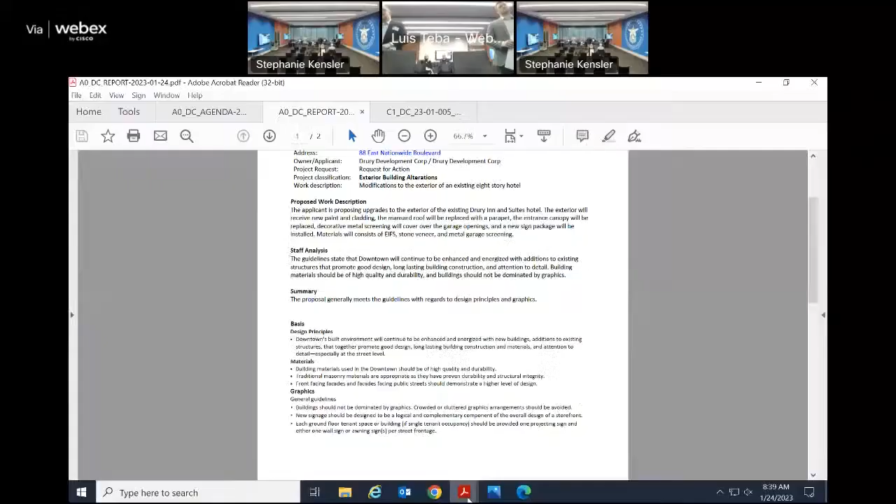Graham, and I'm sorry, what was your name again? Mark. And last name? Kohl, K-O-H-L.

Go ahead and tell us a little bit about the project, if you would. Obviously, we've got drawings and pictures and so on. Yeah, absolutely. Okay, I'm going to use my little cheat sheet as well over here. Thank you, Chairman Whitman and members of the Downtown Commission.

My name is Graham Roop. I'm a development associate of Drury Development Corporation out of St. Louis, Missouri, the owner of the 180-room Drury Inn and Suites located just directly adjacent to the Columbus Convention Center. Also here with me this morning is Senior Vice President Mark Kohl.

Our hotel was built in 2002, and customarily we perform an interior renovation about every 10 years or so. While we continue to be long-term members of the community here in Columbus, we are also planning to reinvest in the exterior of the building and will furthermore be converting to a Drury Plaza Hotel, which is our more upscale brand within our system. This morning, we are here seeking your approval to complete the necessary exterior improvements to bring our building up to our brand standard and further complement the buildings around us.

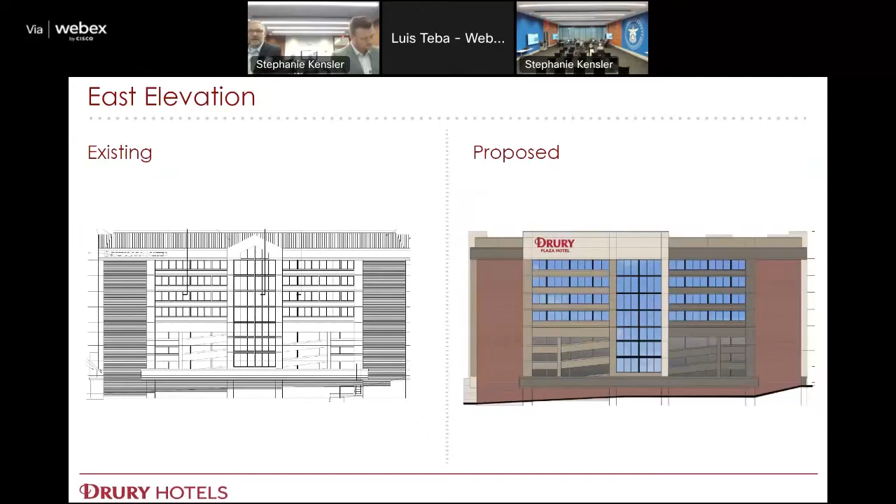What would be the 5 bullet points that make this particular product different? Sure. The Drury Plaza, from that standpoint, the interior finishes in the lobby will have some upgraded finishes, et cetera. The offerings relative to food service and also some of the beverage offerings that we do from a complimentary standpoint will be different.

In addition, here we're adding what we're calling a kitchen plus bar concept. So in addition to the complimentary food and drinks that we offer, we will also have a retail bar area with a light food menu in it. So those would be the main changes to the common areas of the building.

Sure, I understood the answer to Janice's question. Is this the exterior design a Columbus design, or is this an adaptation of something you're doing all over the portfolio?

Yeah, well, this building is not prototypical. So we only have 2 that are built in this configuration. This is the first of those 2 that are being re-imaged from the exterior perspective. So from that standpoint, this is the first and one of only 2 that will look like this. Our other buildings are our standard prototype, not more of this square shape.

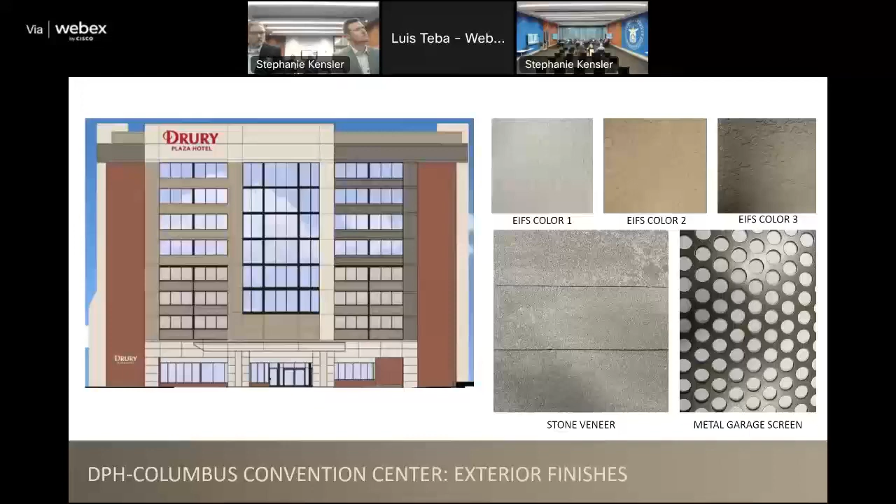And how about the ground floor along there? Can we switch back to there we go, thanks. So you've got a lot, or at least some amount more glass along the front, it looks like to me. Oh, I guess it is. Yeah, yeah, okay. Well, it's pretty much the same.

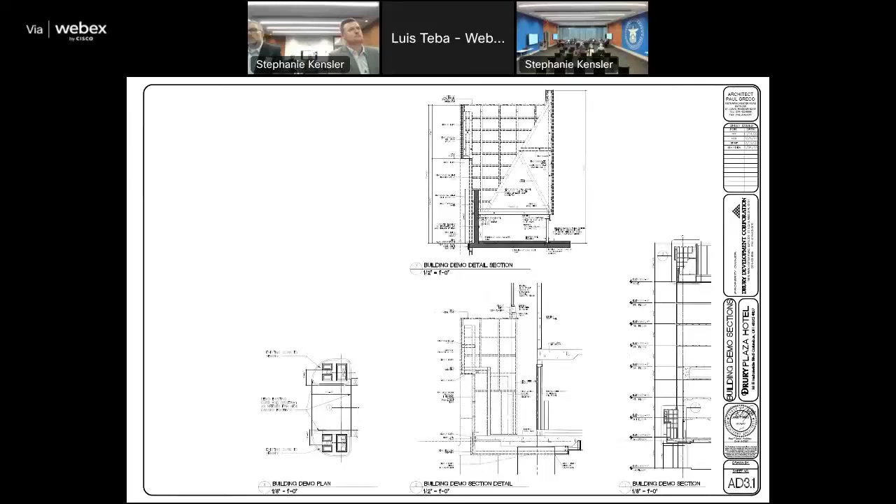The canopies and—what's everybody want to do? Do we have sufficient detail here on this thing? There's a lot of detail in the drawings. Okay. And I would point out that you are asking for the new signs as well, then. Yes, sir. Are there any site plan or landscaping changes?

No major landscaping changes. We have some accent beds and things that evolve over time around our signs, but nothing significant. I think it's an improvement of what's there, a big improvement. It'll be nice and new too.

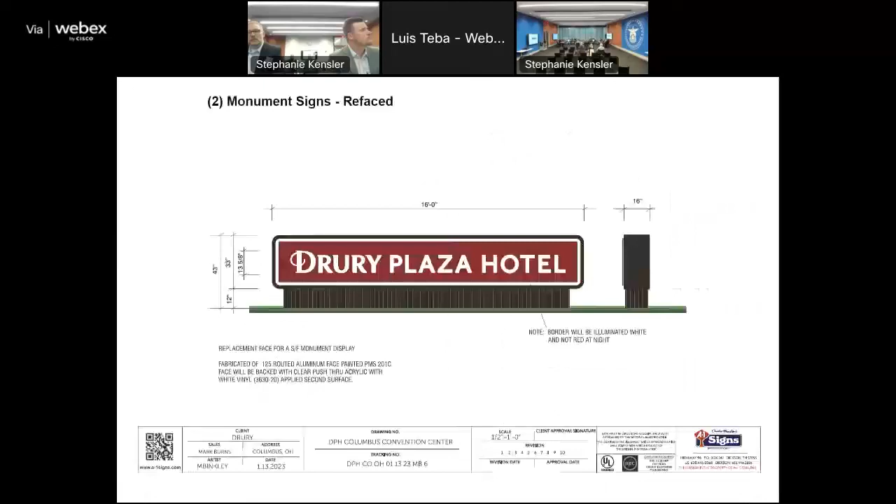I have a question about the original drawing. You have a pediment detail, and there's glazing in that pediment. Can we switch that elevation? So you see the upper middle, where there's the pitched roof with that pediment, and it looks like there's glazing right under there. Is that, on the original, clear glass, or is that spandrel glass with nothing really behind it?

I can't tell you the makeup of the glass itself, but I can tell you there is non-occupied space behind it. So there's not a raised roof element on the top floor of that building. My comment was that on the new building, you stop the glazing and have a straight line going across, which is probably the design choice you wanted and it looks nice. But if there was really something behind that, I was thinking maybe you could add the glazing—since there isn't, it doesn't seem necessary. So it also looks like all of the existing brick remains, is that correct?

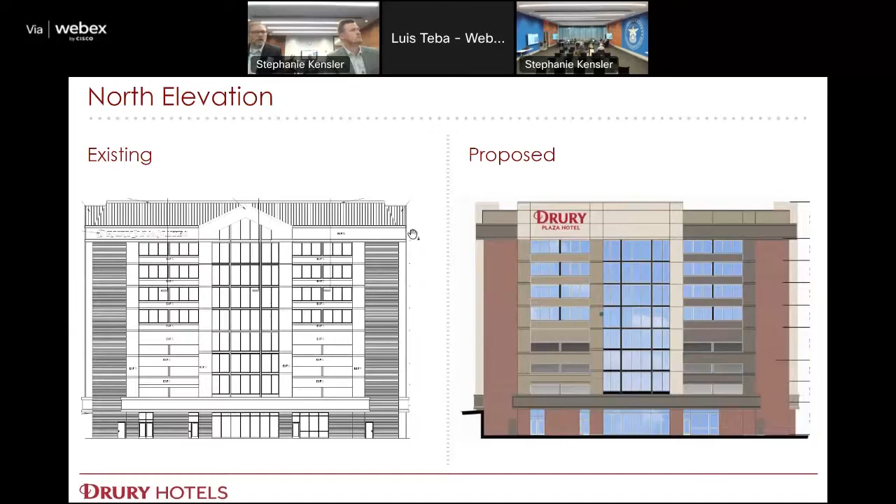If you flip to the front elevation, a minor change here would be on the columns around the canopies and flanking the sides. The brick is getting reclad with a stone product, to add some additional dimension there and a different material.

Okay, well what's the pleasure of the group then? Questions, thoughts, comments? Is there no new EIFS on the project except where you're patching—just existing EIFS that's being repainted—or are you adding new EIFS as well?

Oh, all that? No, you're fine. I was just going to say, yeah, the portion of the parapet there that's going to be reconstructed is ultimately going to—but on the actual building, the existing portion underneath, is that existing and just repainted? It is existing, but there will be portions of it that have additional depth to it, so we'll go in over it and add additional EIFS to give that depth, if that makes sense. So you don't have anything that's existing brick being covered with EIFS? No, not that I'm aware of.

So traditionally, the first floor of any of our buildings are hard surface materials, and so the brick that's being covered up there is being covered with a hard stone material. Okay.

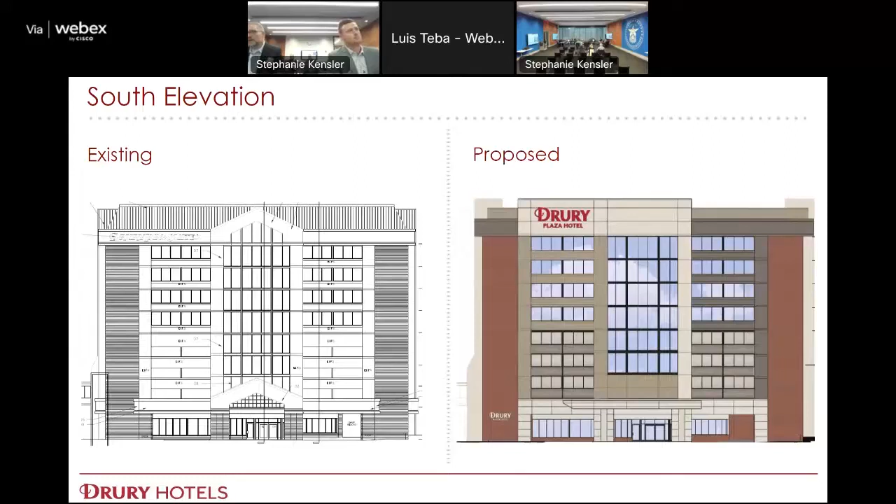With this change, is there any shift in the company's target customer, or any difference in the business plan making these changes? Obviously it's an older hotel, and we want to stay relevant within the market at all times. So the interior improvements were needed regardless.

But here we've appreciated a good run so far in the city of Columbus, and we want to invest the dollars to carry it forward for another 20 years or however long it can be a viable asset. So we anticipate there may be some lift, but largely it's a matter of the overall area, the convention business, and the nature of the convention business, et cetera, as to who our customers are.

So who would you describe as your target customer for your product overall? In this location, the convention center drives a lot of it, downtown business customers during the week. And then we're fortunate that on the weekends, we still pull, even in a downtown location like this, a lot of families and leisure travelers, both for activities here locally and in the near perimeter. Okay, thank you.

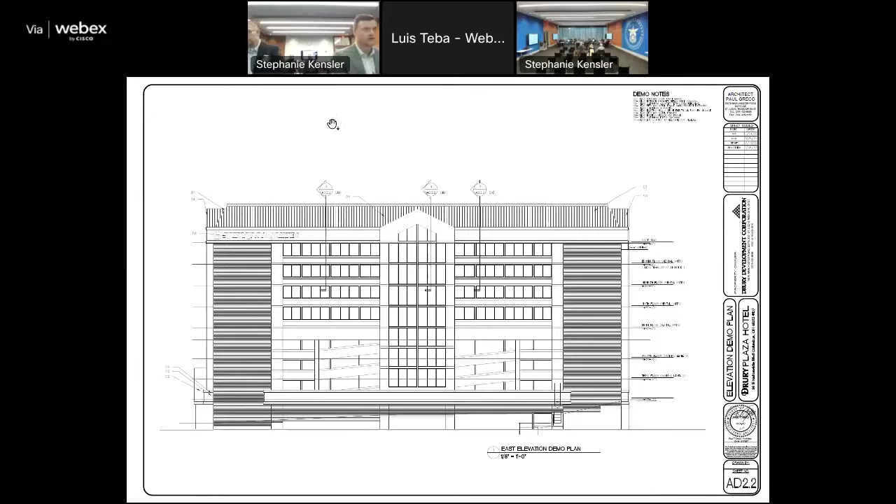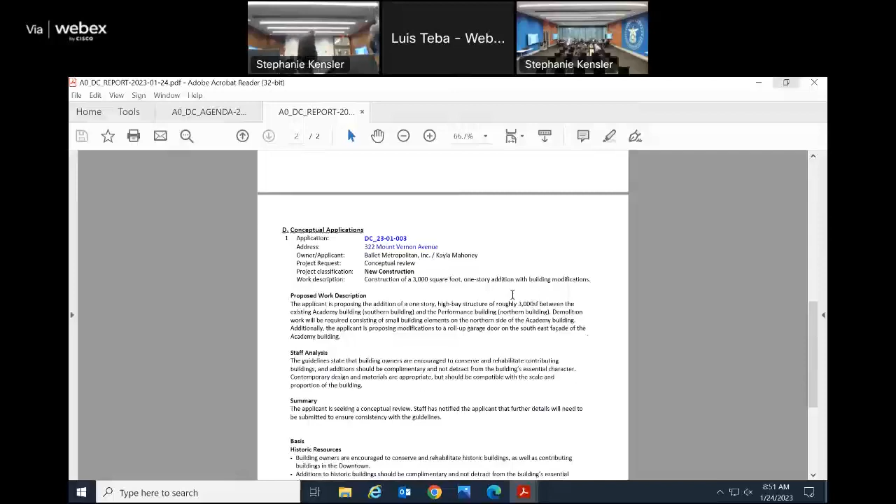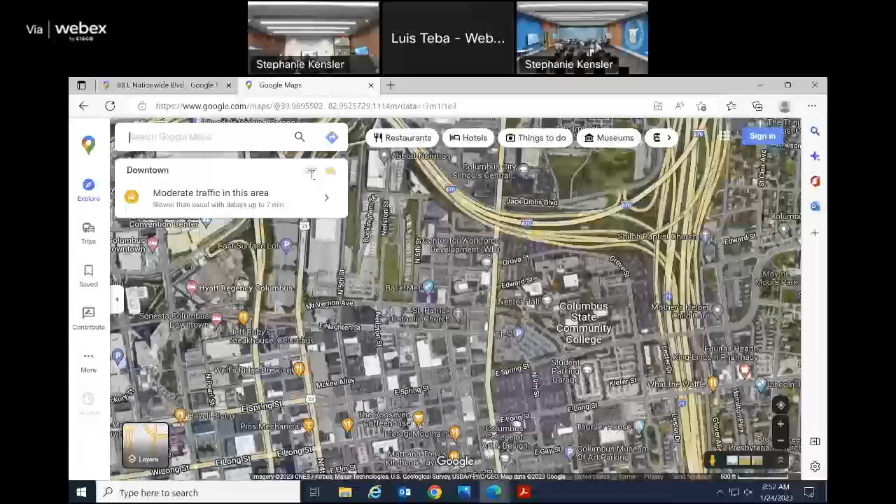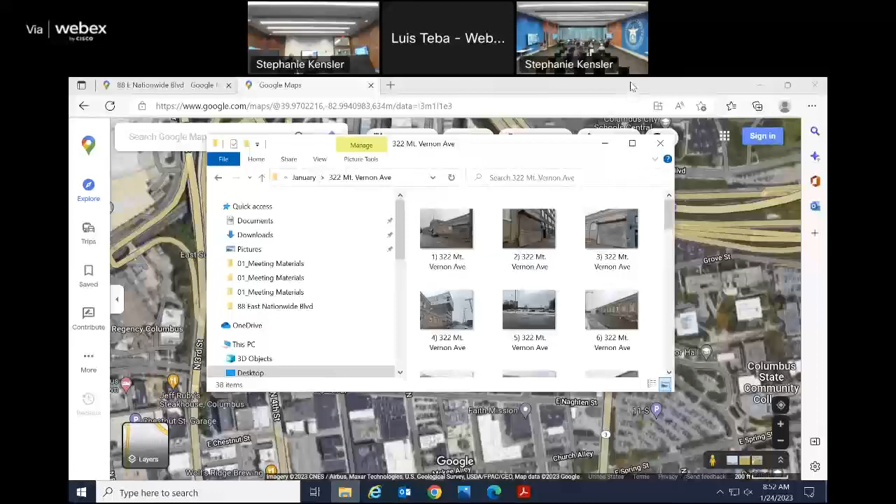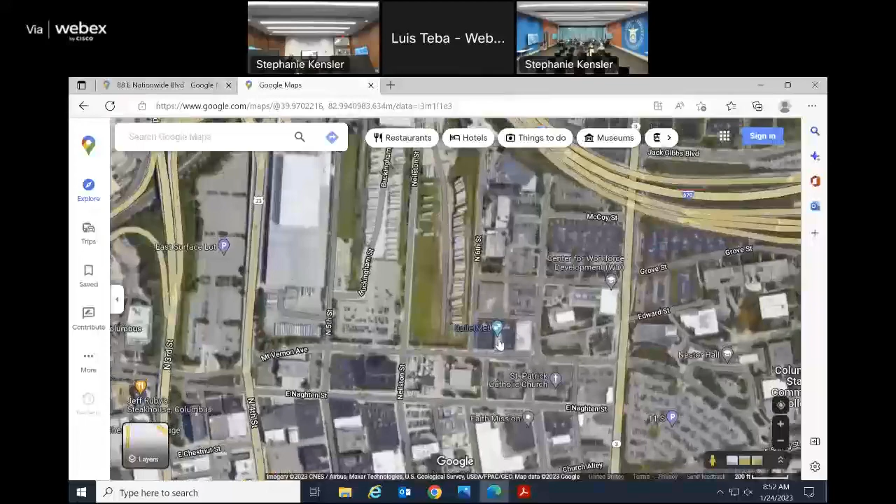Very good. Next case, please. Sure, next case we have is at 322 Mount Vernon Avenue, the Ballet Met, between North 6th, north of Mount Vernon, and North Grant Avenue. I went out and did a site visit of the location.

So here's the south elevation of the building. You can see this garage door here. This is going to be part of the proposal. They're in for conceptual review, by the way.

Here's a close-up of that garage door and another. You can see they have the original kind of arched entryway or something, but now it's been replaced by a garage door.

This is the building directly to the east. And this is the view to the south, just the parking lot to give some context. This is the western side of the building.

You can see this is where the entryway is that they're discussing modifying, right here, this alley between the two buildings. Here you can see a view looking southeast at the building and the alley that is up for changes.

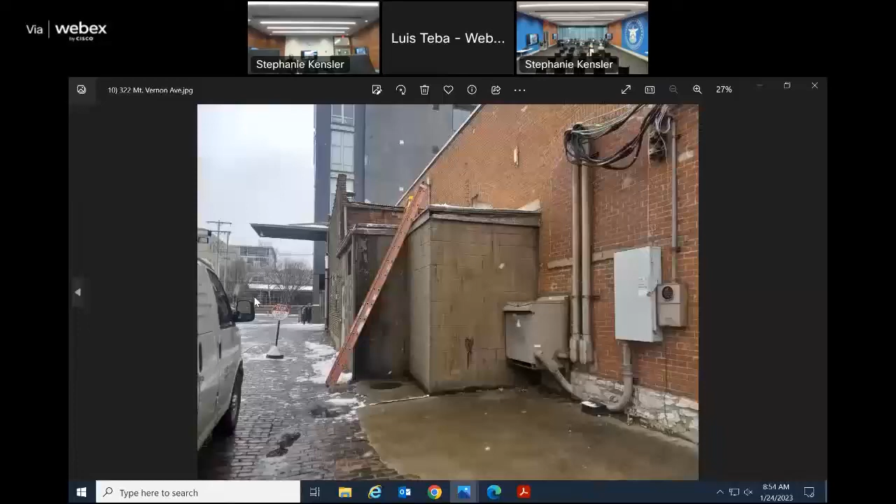Here's a close-up of this metal flashing that will be removed, is my understanding. There will be minor changes to the back of the building. These two stairways will be removed. And this section right here, which looks like a later addition onto the building, has some cinder block and some different colored brick. This will also be removed, if I'm understanding correctly.

Here is the view looking west for some context. And here's a parking lot to the northeast. Yep, and a detail on the brick street there.

So with that, let me pull the staff report up. They're proposing the addition of a one-story high-bay structure of roughly 3,000 square feet between the Academy Building in the south and the Performance Building in the north. Demolition work will be required consisting of small building elements that I pointed out to you.

The guidelines state that building owners are encouraged to conserve and rehabilitate contributing buildings. In addition, additions should be complementary and not detract from the building's essential character. Contemporary design and materials are appropriate, but should be compatible with the scale and proportion of the building. In summary, the applicant is seeking a conceptual review. Staff has notified the applicant that further details will need to be submitted to ensure consistency with the guidelines. And just for your reference, this is not a locally listed historic building in any sense.

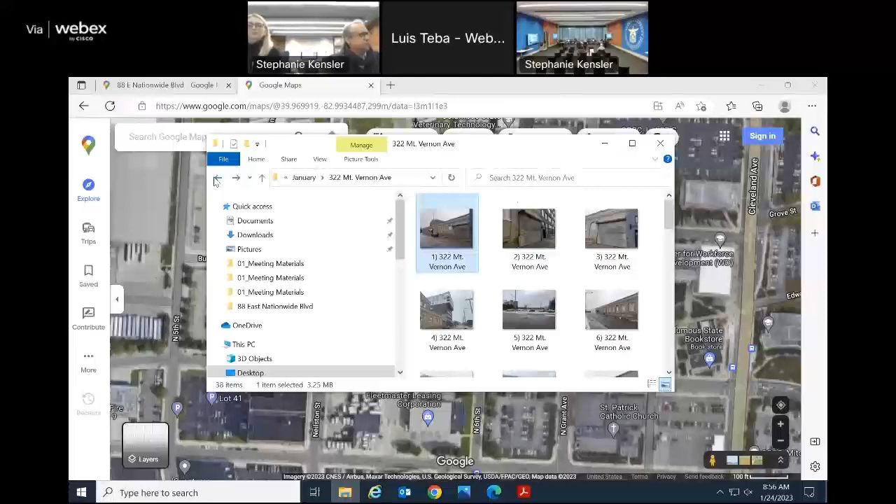So we've been working with the ballet for a few years, primarily on some much needed interior renovations of the Academy Building, which is the historic brick building, and also the Performance Building, which is the not so historic warehouse building next door. This is the third phase of this project where we're connecting the two. We're just calling it a connector, primarily to be used for an expanded entry lobby and lounge for students and dancers, and for functions when they have fundraising events, things like that.

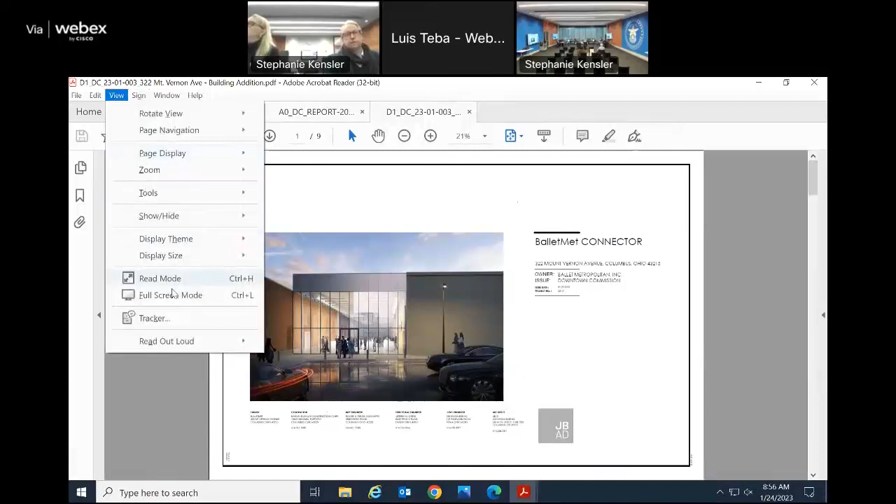So I'll let Kayla kind of run through. Sure, so this presentation today comes in two parts: the new build. Yeah, if you could speak up a little, use that mic. There we go. Thanks so much.

So it's in two parts: this new build, which is the glass box between the two, and then miscellaneous selective demo, which is described here. So I'll start with this. We have a lot of cleanup that we have to do as we get started here.

So looking east, at that top corner we'll remove that metal structure above the old loading dock. We're no longer using that loading dock as part of this concept, so that door will be removed and eventually there will be a ticket window in that space. This entrance here will probably have about 8 steps up to grade and to the current level. You can see the stone base up there underneath those windows. That's where we need to be to connect these two buildings.

The other portions, let's go to the bottom left picture. There is the south elevation of the Academy Building, where we are going to be removing this garage door and filling it in on the backside. That's part of their costume storage. So we've talked about providing additional details of how exactly we're doing that.

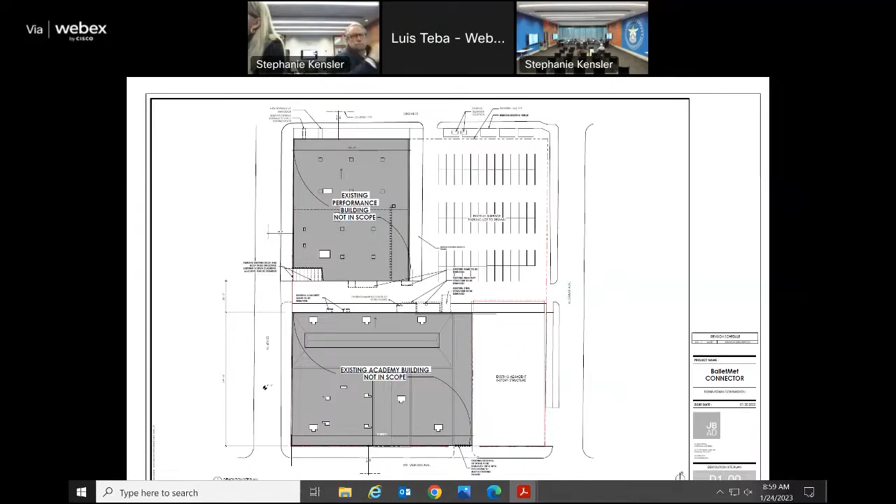That's a site plan of some of the selective demo items, mostly in the alley, and then one on the south facade of the Academy building.

Sure, that'd be great. So you can see there's an entry on both sides—this is the connector in the middle. It's about 3,300 square feet. We have two entrances, and in general this connector is going to serve as a new front door to the ballet. If you've been to the ballet, it's kind of difficult to know where to enter.

So the west side will be like a student drop-off area, and the east side comes directly from the park. Both will serve as a place for students and parents to hang out without disrupting the class function in either space. The large textured floor area there is concrete, is that the idea?

And outside on the east side, are you going to use some of the brick that's existing in the alleyway? Not from the alleyway—those bricks are pretty crumbled. On the south side there's historic bricks, kind of dark maroon. The ballet has some of those stored that we would like to use on the east side.

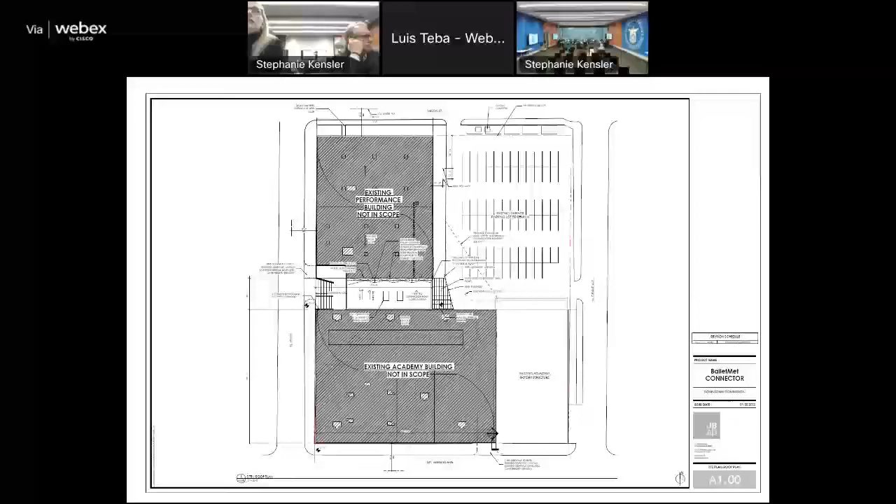For the east entry—well, both entries really—but is there a canopy over the west entry? While we're talking, is that glass wall back, up the stairs and back? Or is this the east side? Can you switch back to the west side? Where the door is, that's where the glass wall is, right? Yes, so all of that is open up the steps then. I don't know if that's related to what you were asking.

So there's a question—do you need protection from rain? It wasn't discussed with the ballet, but it's something we can talk to them about.

What about the signage? What do you guys think?

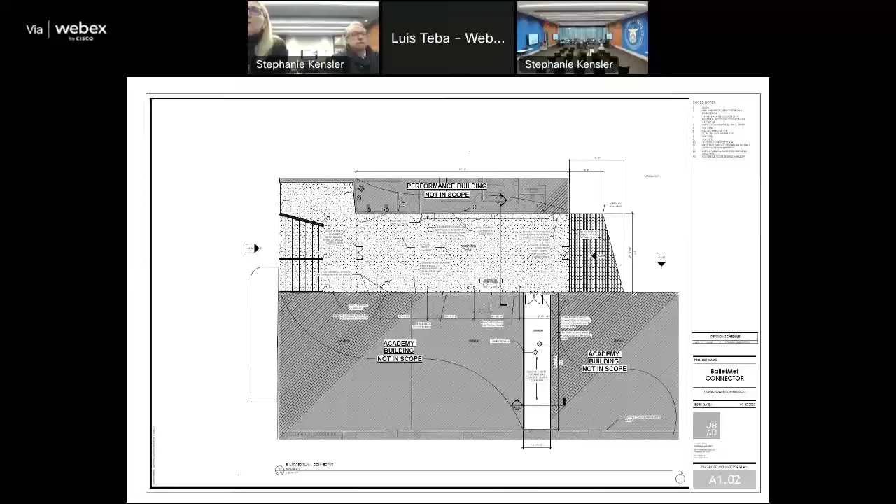We're not going to go with that at this point. The ballet changes their logo quite frequently, so from a cost perspective, I'd say come back with that if it happens, we'll let you know. We're very open to it; if they have a new logo, let's put it up, as long as it's tasteful. We can handle that on the fly.

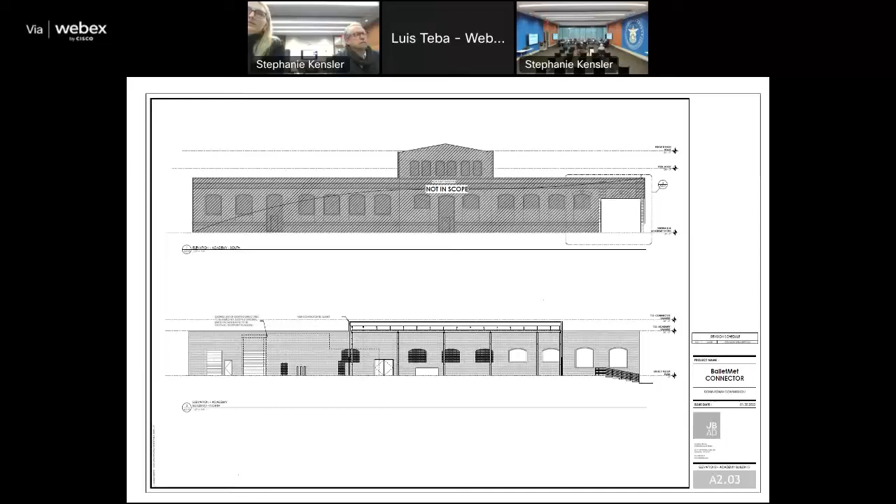I don't mean to speak for the group, but I have two, maybe just two comments, that as you develop the project you might be interested in. On the Academy building, on the north facade, I think there are three windows that are right now...

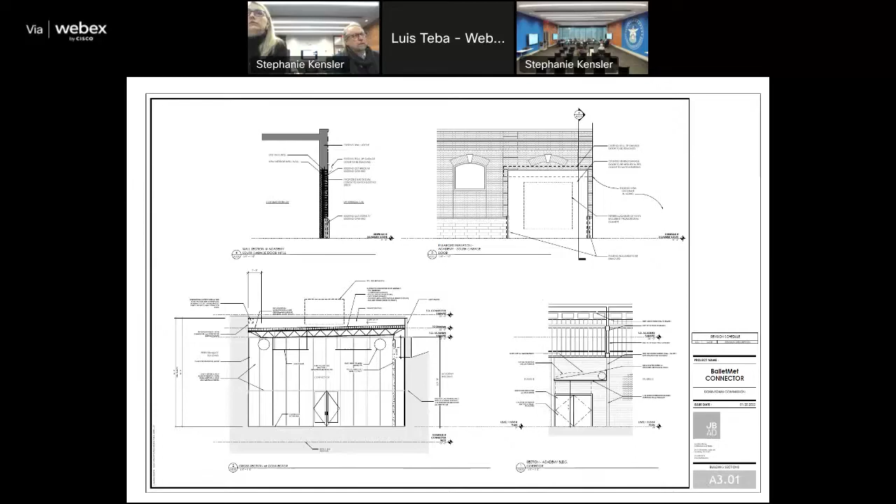They're arched windows and they're blocked in, and then there's a fourth one that isn't. I think all four of those are going to be enclosed by the connector. So I'm wondering, depending on what's happening functionally in the Academy building, for the one that has glass now, how will you treat that? Are you going to leave it as is, or just open it and change the glass? And the ones that are blocked in, is there any interest in maybe opening those? Would that make the space more dynamic, or make it interesting on the other side? There are lots of open windows there.

I think those three and then that fourth one. But then there are four other ones that are— right, but I don't think those are included. Those three that are blocked up and the one that's open, to the right of it, will be inside the connector. Yeah, and I think those four are going to be inside the connector. Is that correct? The three openings that are blocked up and the one just to the west of that, that one there will be inside the connector. Yes, that's what I thought.

The others are outside. So I'm wondering about those four windows — do you have any thoughts, I know you're still in the conceptual stage, but do you have any thoughts on whether you want to just leave everything as is, or do something with that?

The current plan for those three is, unfortunately, to leave them. We would love for them to be open, but because we're connecting two buildings, those are both fire walls. So even the one that's open will have a fire shutter on the other side, in their studio space. The design was certainly to not block the light, as they want that light in their studio space, that corner studio. This is a fire-rated wall. The other thing is, with this connector being a place that people occupy, they didn't really want people from the connector looking into the studios and distracting the dancers.

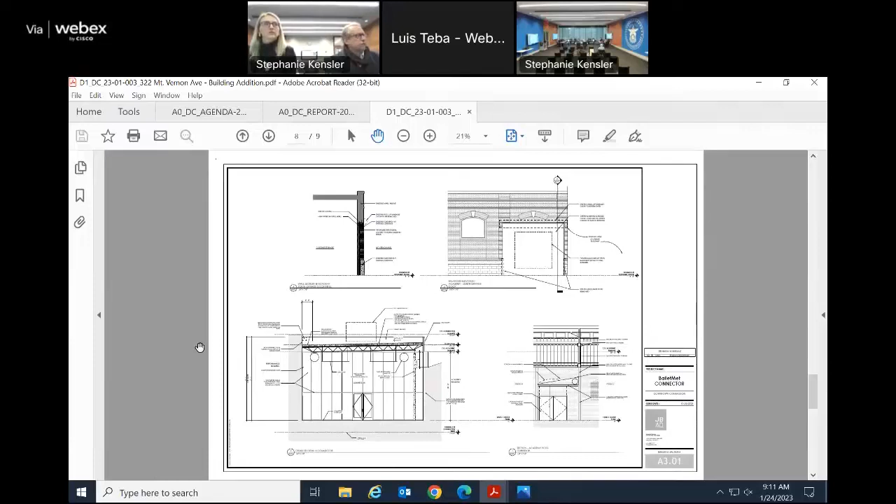Essentially, we're trying to do something that has very minimal intervention, I think you could say. We're not trying to create a new image for the lot, for the ballet. We're trying to do something very simple and cost effective that fits their needs. I think it's great. Any other questions or comments? I like it too, I think it's good.

So this is conceptual, so we will be back and we'll be addressing some of these issues, including the sort of entry cover, which I think is a fair question.

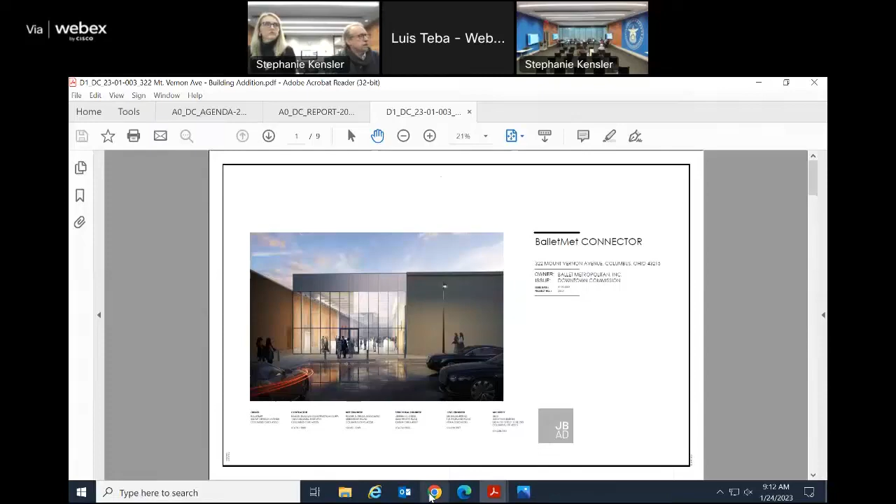To move things along, we would like to get approval to remove those two bumps on the alley side, on the left side of that image -- those brick structures that Kayla mentioned, with a decommissioned boiler and something else. Somebody made a comment about taking one of the structures, leaving it and cleaning the brick, hopefully restoring what's behind it to look more like the rest of the wall.

So that whole brick structure where the boiler room is, that goes away. And that metal thing there goes away too. That'll be an improvement just by demolition.

And the little metal-clad thing on the very right there, the little small shack -- where the wood pointer is. So how do we do that? You need a permit for that, right? So we have to give you a certificate of appropriateness. Is that used for anything anymore?

My name is Ed Rinaldi, construction.

Were you sworn in? Would you step up for just a second, Ed, please? Would you identify yourself for the record? Ed Rinaldi with Hanlon Rinaldi Construction. Do you swear and affirm the testimony you're about to give is the truth, the whole truth, and nothing but the truth? If so, say I do. I do. Thank you.

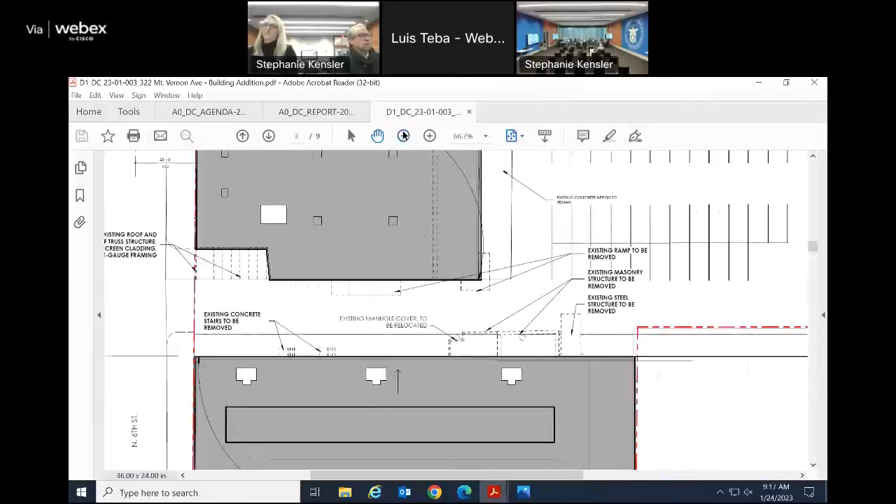Let's just wrap this up then. Are there any other thoughts or comments? Anything you need to know from us? I think what you're hearing is it looks good, and everything you're doing kind of makes sense, the addition. I think it's great. It's a nice use of the space, because the space does absolutely nothing, and in a way kind of interferes a little bit with the traffic pattern.

Are you doing any landscaping or lighting or exterior block revisions or anything? Landscaping, probably not. It's a pretty urban environment, so we kind of want it to remain. Lighting, we can address that as well. Are the bollards that you're proposing...

Could be, why don't you come to us with some lighting that you'd like to do? Does that make sense to everybody? Anything else to finish the project, sure. Okay, and then please, when you come back, bring samples and so on, because we want to be very specific about what we're approving.

Yes, one other question. In your line of questioning you brought up handicap access from 6th Street, and you also brought up the question about covered canopies. So where do we go regarding, do we have to do that to get your approval when we come back, or is that something? I think at this point it's conceptual. We've made some comments and suggestions. It's up to you to figure out what you want to do with them.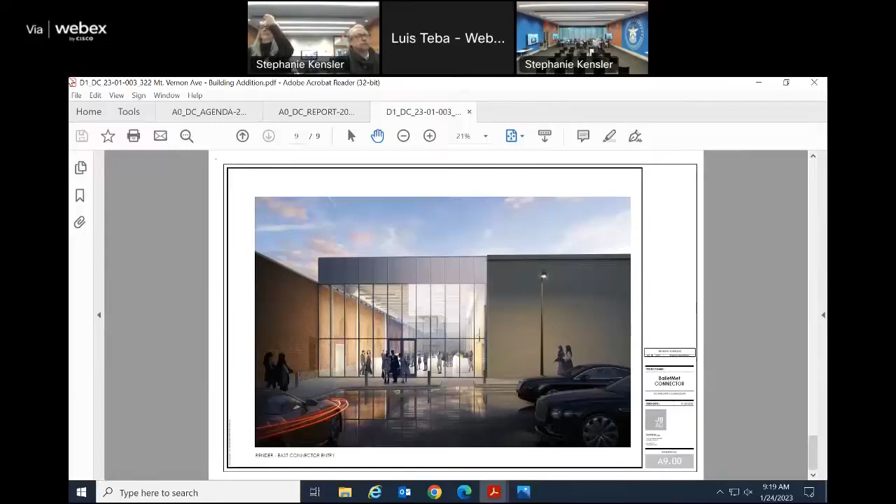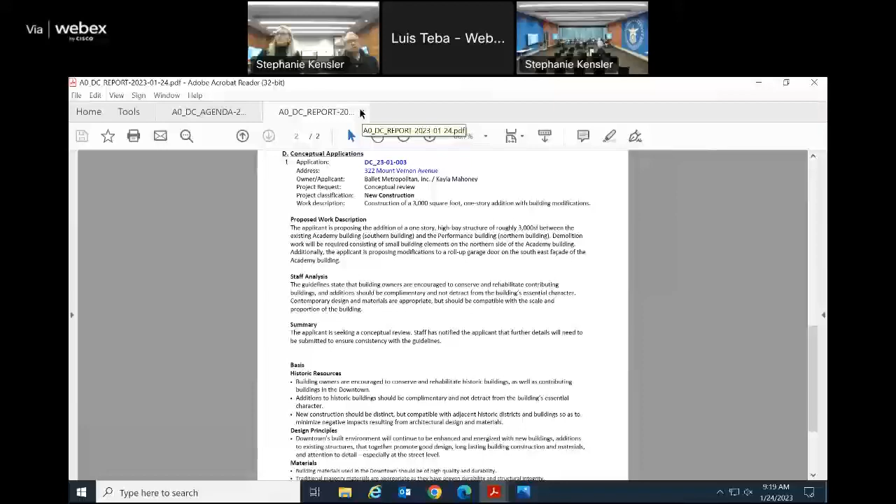Appreciate it. John, just to explain it, because you're here a lot, we're trying to make a concentrated effort to get owners to come to these hearings, because when we make changes or request changes or whatever, we want them nodding. We've had some issues with a couple projects, not yours, but that's the rationale behind that, or a question comes up and there's really not an answer for it. Owners ask us that all the time, really, should I go? And I've usually left it up to them, but since that's a preference, I'll keep that in mind going forward.

Yeah, okay good, anything else? Thanks guys, thank you, appreciate it. Are you guys, you understand where we are, I think? Yes. Okay, thanks.

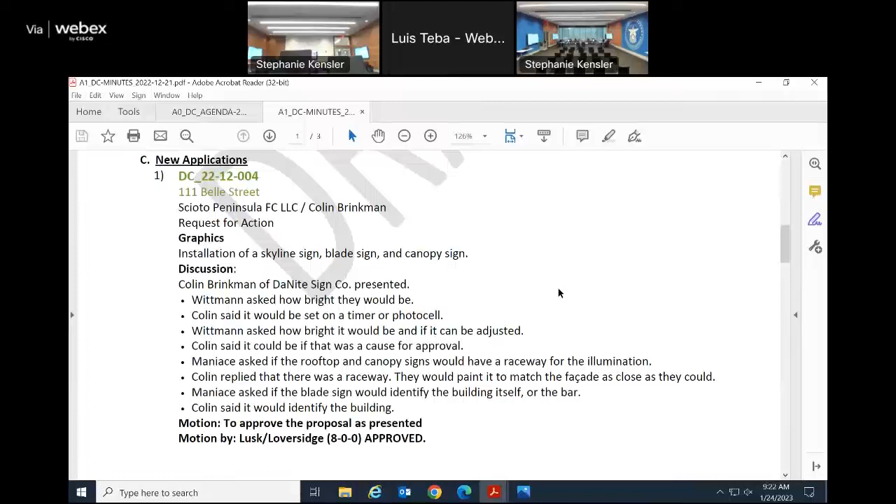So I think that's just one more thing, that if we really want to do that, we've got to say let's make it part of the motion.

Okay, go ahead. Anything else for us? No, and I don't want to, I mean, and if that comes up, I can also remind you if you'd like, I just don't want to get too involved. Oh, no, can't, sometimes that's fine.

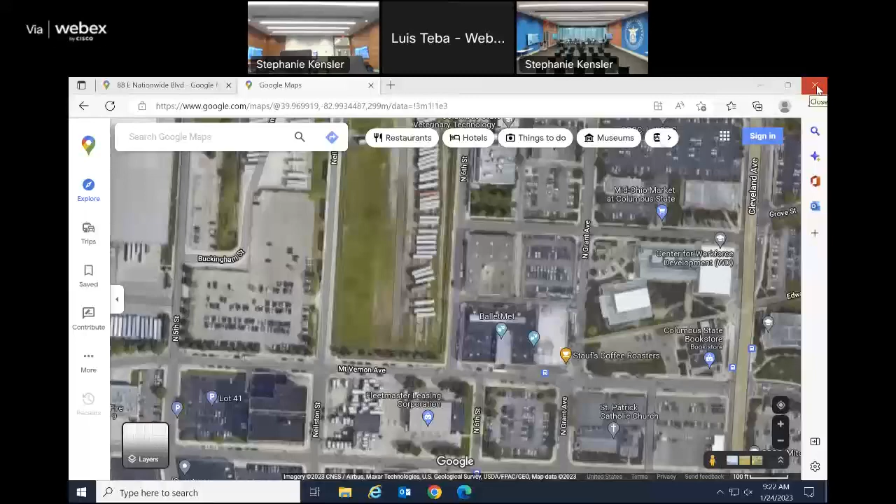I think all I want to do is when we've got to keep striving to make sure that we approve very specific things, and then that we keep a record of what we have actually literally approved. That's all I'm getting to.

Yes. All I wanted to make one quick point, are we open for discussion? Anything else you want to do with us? Yeah, no, open discussions. Okay, everybody got this,

I guess it was a survey that Mark Villas or somebody sent out, I sent it to you on behalf of the planning division. And I just wanted to discuss this.

What I said, my comments were, it was very simple, frankly, I didn't have really much to say. I think we do. They said, what are your positives and negatives? And I think we do a very good job.

I just said we all need to remember that we want to be prepared for these meetings and we want to be involved, and I think we did. And by the way, our attendance, for example, has always been very good. So I think we do a good job on that.

What I did think is that we have to keep hammering on is that we want to make sure that the applicants are prepared, that we have drawings that are well done and very specific, and bring in samples so we can see it, so we know what we're approving.